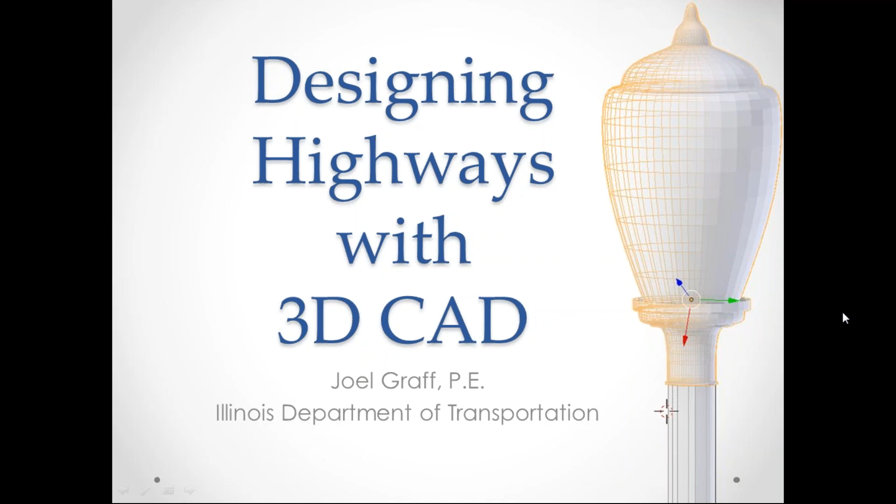So to get started, hang on a second here. There we go. So to get started, we're going to explore 3 key questions as we go through this presentation. Number 1, why at IDOT are we doing this? Number 2, how does this work? And we're going to talk about 3 different areas in which 3D modeling applies. Number 1 is construction. Number 2, visualization, which is more preliminary engineering. And number 3 is design. And finally, we'll briefly look at what it's actually going to take to get there from where we are right now.

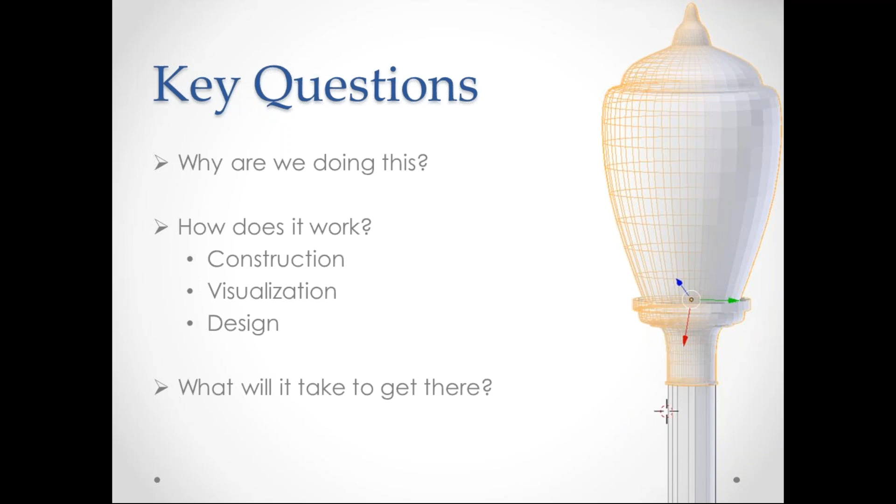When we talk about why we're doing this, there's an executive leadership commitment that states that IDOT wants to implement 3D engineered modeling from project conception and initiation through maintenance and operation.

Notice the scope of that statement: project conception and initiation through maintenance and operations. In IDOT, traditionally, project lifecycle consists of 4 key phases. Phase 1, preliminary engineering. Phase 2, design. Phase 3, construction. And phase 4, maintenance. So most people don't even think of maintenance, but project lifecycle actually continues through that.

And this 3D model will begin in our preliminary engineering and be useful in public meetings, through design, in developing and engineering the final product, in construction and building, and then finally in maintenance, where we're going to be able to track significant changes, things that we do to the roadway in our maintenance cycle, so that when the next project that goes through there needs to know what's been done in the intervening time since the end of the previous construction and the start of the next project, they will have that 3D model which describes all of the maintenance activities which have occurred in that time.

But the real primary reason why we're doing this, at least now, is because general contractors, more recently, have incorporated higher technology into their construction equipment, to the effect that the equipment is now GPS enabled. And with the ability to program 3D coordinates into their construction equipment, they can establish grades quickly and efficiently.

Well, how does 3D modeling work then? What exactly is this process, and how does it actually work for us in an engineering context? Well, it's important to distinguish the 3D modeling we're doing in this context. In order to really understand the value of it, we need to talk about how we do engineering right now in CAD. Our current processes are focused on 2D CAD processes. And so in the end, what we're doing is creating a model of reality. In fact, everything we do at IDOT pretty much is all about modeling reality somehow.

And right now, using our 2D CAD processes, in order to create a model of the finished product, we actually have to create 3 distinct models. Generally speaking, they're the top, side, and front views. For any of us who are familiar with CAD, that's pretty familiar terminology. In the industry, we call them plan, profile, and cross-section.

In a 3D model, we're building one and only one model. And this model is parametric and volumetric, and we'll talk about what that means in just a little bit. This is a model that everybody uses across all phases. It's one and only one model that everybody has access to. And finally, those 2D views that we live and die on right now really become just a secondary consideration and can be arbitrarily generated at any point in the life cycle.

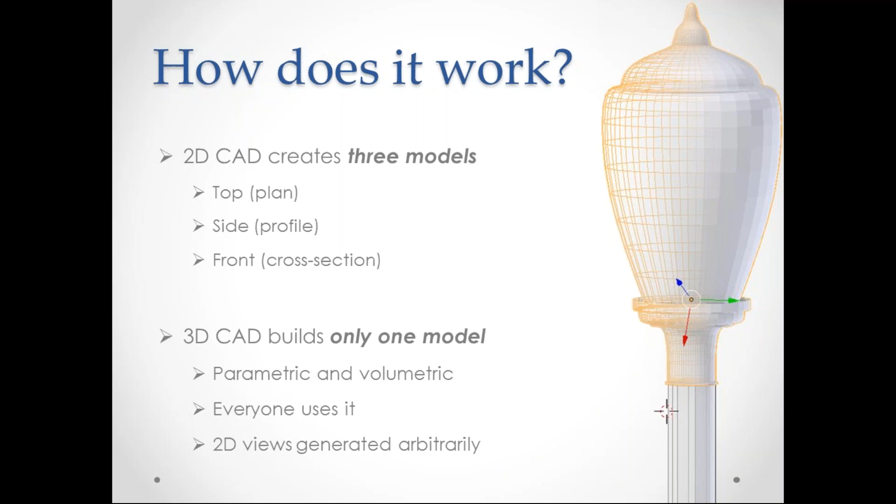So when we talk about this new 3D modeling, it's important to understand that what we're talking about is actually parametric modeling and not 3D modeling in the traditional sense. 3D modeling in the traditional sense is all about building meshes, points interconnected by edges that generate surfaces. If you take a look at the background graphic there on the right, you see a lamppost. It's an asset that I created for something we'll see in just a little bit. And you see the wireframe mesh that lies behind that surface.

In traditional 3D modeling, the sort of thing you'd see at, say, Pixar when they make a movie, they are focused on working with that mesh directly, pushing and pulling vertices to change the shape of that surface. That is a very complex and detailed way of dealing with 3D modeling. It's something people go to school exclusively to do, and to try to put that on engineers trying to build highway models just isn't going to work.

Parametric modeling sidesteps that whole issue and allows us to express or design our 3D models in terms of engineering parameters and constraints. And as a result, once we've specified those parameters and constraints, the software then generates our 3D model for us based upon those specifications. It's a much more powerful, straightforward way of doing it.

But in the end, the workflow to actually build something in 3D is completely different from doing something in 2D. I might liken it to moving from Windows to Mac, but I can't even say the comparison is that similar. I think it's even more different than that. And so the mental shift that's required to think in terms of 3D parametric modeling versus our traditional 2D processes is really substantial, and it's really a major hurdle.

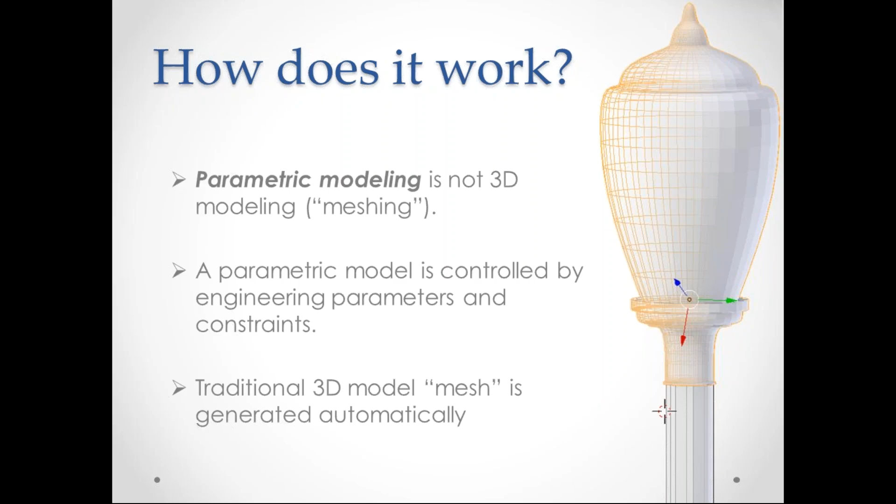So in terms of construction, ideal applications for 3D modeling are primarily new construction and reconstruction projects where you're undergoing major profile and/or cross slope changes, okay? Again, in terms of construction, there's little or no benefit for projects where you have narrow surface widenings, mill and fills, overlays where you have little or no profile or cross slope changes, locations where you have poor GPS signal.

And I'm not only talking about the boonies in the middle of nowhere, but also urban environments where you have large buildings that might occlude that signal. That makes 3D models less valuable in terms of construction. Also locations where there's little or no existing survey.

That is becoming less and less of an issue these days than it used to be with the proliferation of LiDAR data, for example. If I'm right, the state of Indiana has put online LiDAR data for the entire state to varying qualities and degrees. So the proliferation of survey data is making it less and less of an issue, but it's still a problem out there.

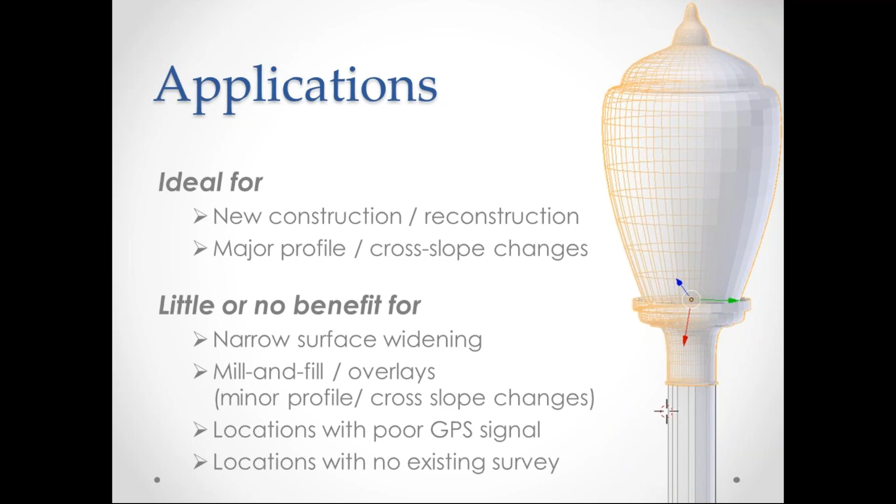Actual benefits that we see on the ground in construction. Number one, the goal is to have a 3D model that is fully constructible. The idea is that once a 3D model is published from design to the construction phase, that model will contain anything and everything required to fully construct that project. The ability to stake anywhere within the project limits is entirely possible. Every point in that entire project is defined, and so every point can then be staked.

We have improved accuracy in transitions, intersections, and earthwork. That's especially important because right now, contractors who wish to produce 3D models from a 2D project can do that. They can take a paper set of plans from a DOT job or something, and they can produce a 3D model from that.

But the software that does it doesn't generate very good accuracy where you have funny stuff going on, you know, transitions from a side road to a main line or tapers or things like that. It works best where you've got long, straight, generally unchanging sections of roadway. This, of course, being a native 3D model from the start, will eliminate those sorts of inaccuracy issues.

Utility conflict identification is greatly enhanced, with the caveat of garbage in, garbage out. At IDOT, we are a member of JULIE, and we rely on the accuracy of the utility owners who are also a part of JULIE to provide us that information. We are not saying with 3D CAD that the location of the existing utilities is any more accurate than it was in the past, since we don't have control over that.

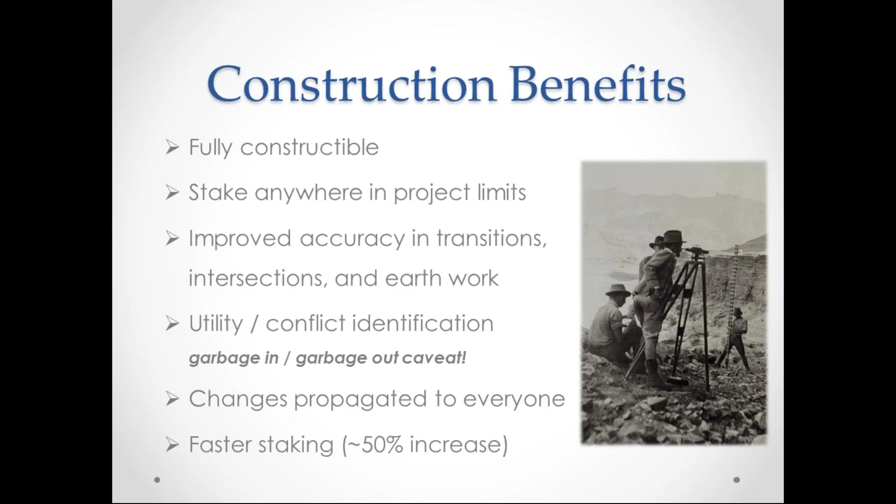But the real value from my perspective is not so much how it helps construction. That's well established and has been proven in practice. The real value is figuring out how it's going to help us in the preliminary and design phases of a contract project. And so I want to take a moment and focus on visualization. Visualization is really all about preliminary engineering. It's not a part of the IDOT roadmap right now, but it's going to very quickly become a part.

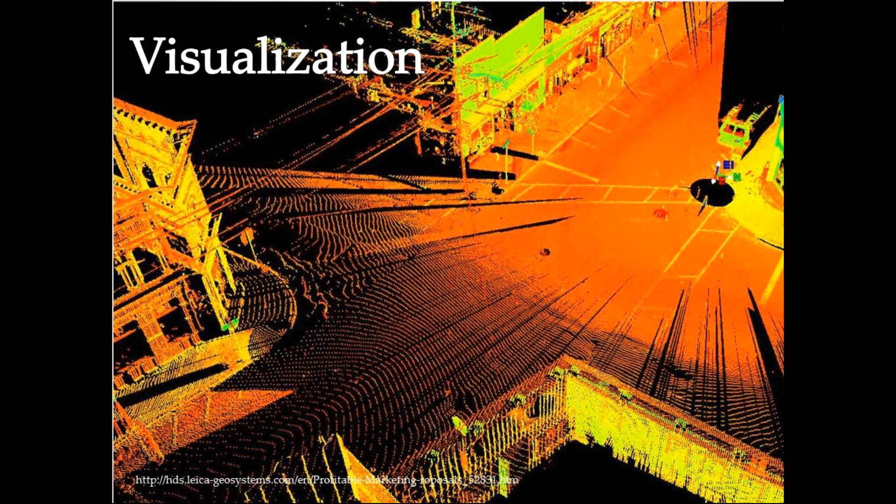It's going to be a very valuable addition to the process of developing a highway engineering project. When we talk about visualization, what we're doing is we're producing an existing model of a location that's going to see an improvement, and merging that with the proposed improvement. Okay, we've seen this done all sorts of times. We've seen the color printouts of, say, a river and a picture of the proposed bridge pasted on top and things like that.

But in a 3D sense, when we produce a 3D model for visualization for preliminary engineering, we are able to increase the amount of information that we can communicate with a single model 50 to 100 times over the amount of information you can communicate with simple two-dimensional pictures or plan and profile views and cross sections.

Because you're really asking a lot when you take this stuff, especially to stakeholders and public meetings and local officials, to ask them to look at these two-dimensional engineered drawings and abstract in their minds the proposed 3D model that we may intuitively see as engineers. And by producing that 3D model, everybody intuitively understands 3 dimensions. We are 3-dimensional creatures, and we can very easily extrapolate the end result from the 3D model.

Another advantage to this is that they can be interactive. And when I say interactive, what I mean is they can be anything from a pre-programmed fly-through going down the road or along a path to a model where the user can actually navigate themselves through it. And the other advantage, at least on an internal side, is it allows us to rapidly prototype solutions early on to see how they look, how they impact the environment, and what sorts of challenges any one given solution may provide in the course of doing the design engineering.

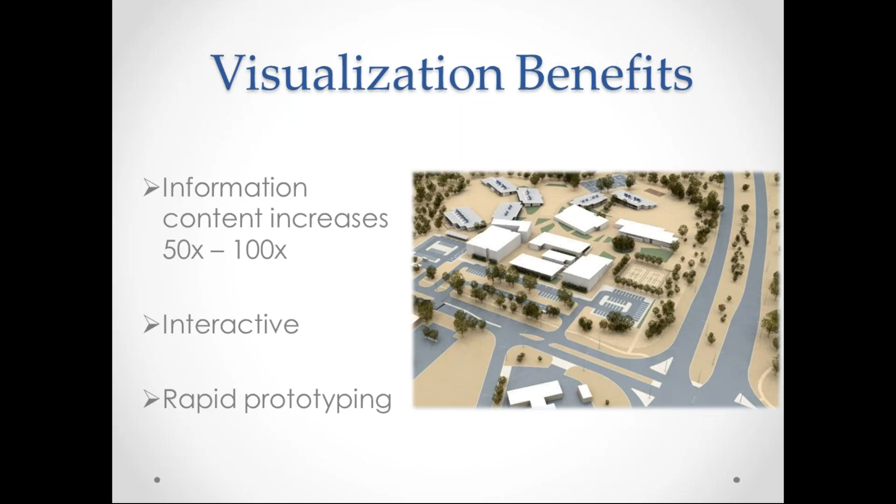So when we talk about prototyping and building a visualization, a preliminary engineering model, we need first to reproduce the existing infrastructure, and that's done primarily one of 3 ways. Number one, we can grab existing LiDAR data. It's a tool that's out there that everybody knows and uses a lot. A second is laser scanners, and if you're not familiar with laser scanners, they look like total stations, like your regular survey instrument. You set them up on a street corner, you push a button, and they literally scan their environment, producing what's called a point cloud of data.

If you look at the picture on your right, it looks like a dense contour map where you can see the sidewalk, the street, the back of the stop sign, the facade of the building. You can even see the power lines. Those are actually individual points, so dense they look like contours, produced by a laser scanner. Once we've developed that point cloud, we can bring it into a software. We can produce a mesh, which creates a solid 3D surface, and reproduce a very, very accurate existing model quickly and easily of our existing conditions.

The other method that you can use is called photogrammetry, and that's more of a manual method. I've actually done this with a church in a 3D modeling software. Somebody gave me 4 low-quality iPhone pictures of the inside of a church, and I built a reasonably accurate 3D model of the entire thing just from those 4 pictures. That technique gets used a lot, even in MicroStation CAD, for producing unique 3D elements or maybe quickly producing a visualization of something where we don't have access to more accurate information.

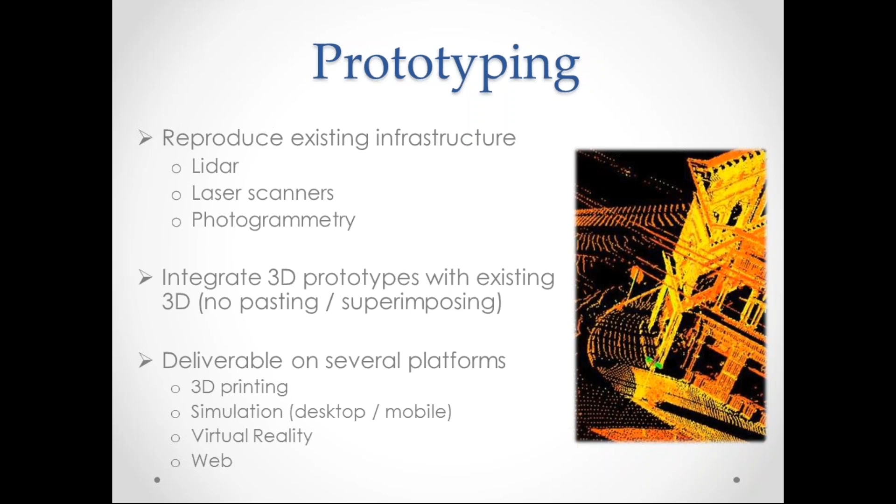So I want to take a moment and show you what a visualization like this actually looks like. When I got involved with 3D CAD, one of the first things they asked me to do was to play around with this project that we're working on. And the project is Route 2 from Byron to Rockford.

If you're familiar at all with that area of Illinois, a few years ago we rebuilt Illinois 2 from Oregon to Byron. We reconstructed the entire pavement, built new PCC, widened it, just did a beautiful job. It's fantastically better to drive now than it was before. Now we're going to do the same thing on Route 2 from Byron to Rockford. And the picture you see in front of you is a railroad overpass on Route 2 just as you're heading out of Byron. And then there's a little pull-off on the right.

And when I got involved in this, I have a history of doing 3D modeling and visualization. And the people that got me involved here at IDOT said, can you do a before and after of this location, of the bridge? Because we want to add a multi-use path and widen the road and things like that. Can you show what it would look like before and after? And I said, well, we can try.

And so I set out to do that just to see what you could do to build a visualization. And I never built the after, but I did build the before. And I kind of want to show you what that looks like. Here we go. What you're seeing here is a 3D model of that existing surrounding. And what I did was I built it using IDOT LiDAR data.

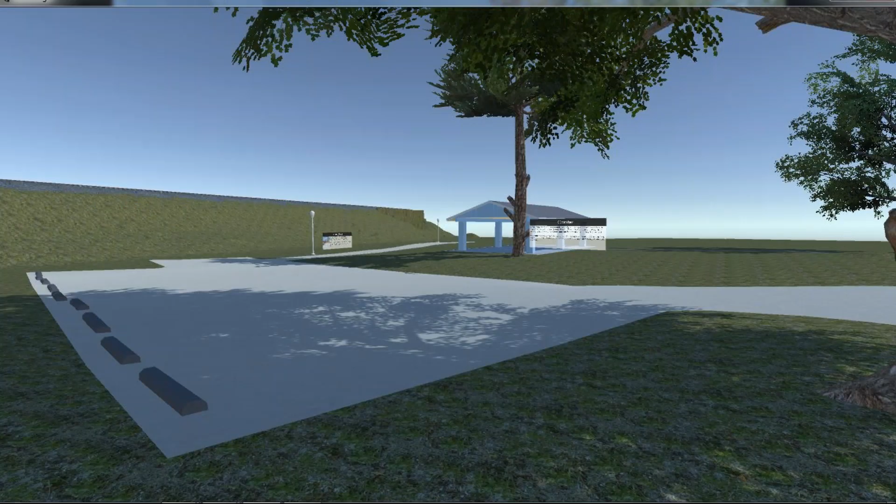I provided a general grass texture for the grass. Unity 3D has SpeedTree trees. It's an algorithm that generates fairly realistic looking trees of whatever type and size and shape that you want. So I was able to reproduce those, and those kind of represent what's actually out there. Parking blocks and the pull-off. The ground, the pull-off, the roadway, all of that, like I say, was pulled directly from IDOT LiDAR data.

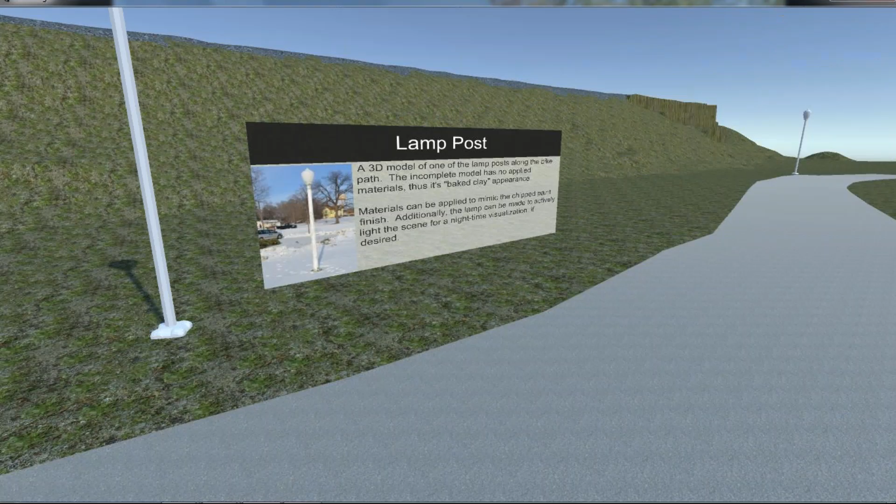Over here we have a pavilion, for which I used photogrammetry. I used pictures I took from the ground and Google aerial photos to build that. I didn't actually take any measurements whatsoever. It turned out fairly well. If you come over here and take a look at the path that goes from the parking area, there's a couple lampposts as it is in the real world.

Here's a picture of that lamppost, and I used this picture directly in Blender 3D to build the actual model. You see that the lamp itself looks kind of gray and clayish. That's because I never actually finished texturing it or applying materials to it. There's kind of a chipped paint look on it. I could have done it. Wasn't really worth the time. If I wanted to, I could actually activate those sconces and make them light things up.

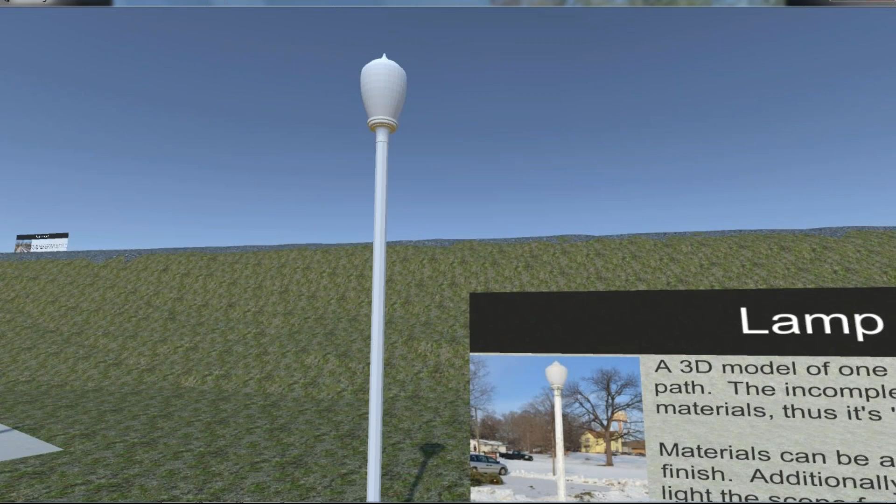We could make this a nighttime scene, and you could see how these existing lights light up the path and compare it to, say, a proposed lighting scheme. We could throw in some proposed lights and show how that difference looks and compare them directly.

If you move up on the berm here, up onto the railroad tracks, I managed to reproduce the actual railroad tracks with the ties and ballast. We can come to the end, and we can see here the LiDAR data ends because the bridge picks up and takes us across the Rock River. And if we go back the other way, we'll just run down the tracks here. We can come up on the overpass, the Exelon overpass itself.

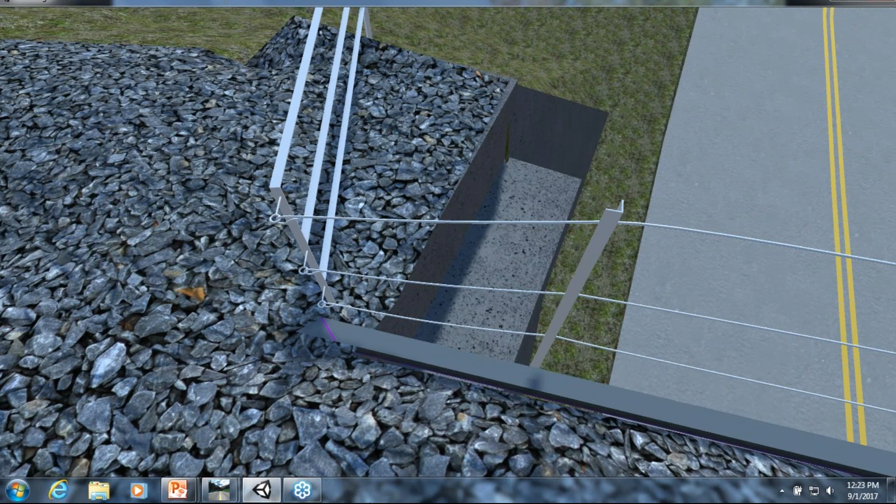And I took the time and actually modeled the cable bridge railing on it. Now, this is not something that could be very easily done. I don't know if it could be done at all, really, in CAD as it stands. So this is something I had used Blender to do, but I was able to reproduce fairly accurately the cable stays or the cable railing there on the bridge, just to see what could be done.

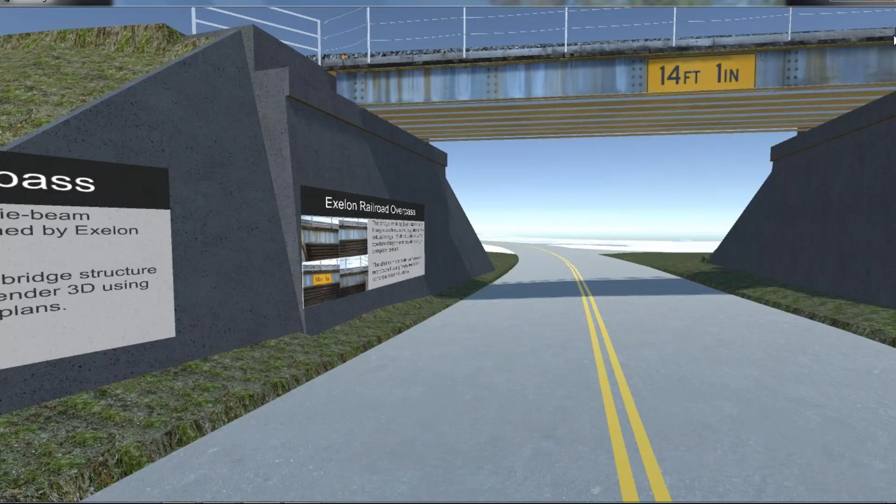But if you jump down and take a look at the bridge itself, what I did was I went out and I took pictures of it, and I got some good close-up photos of the bridge beam, or the facing beam. And this is an old Carnegie beam bridge from the 1930s. So we had the as-builts. I was able to get the beam sections easily online, so it was really easy reproducing that bridge.

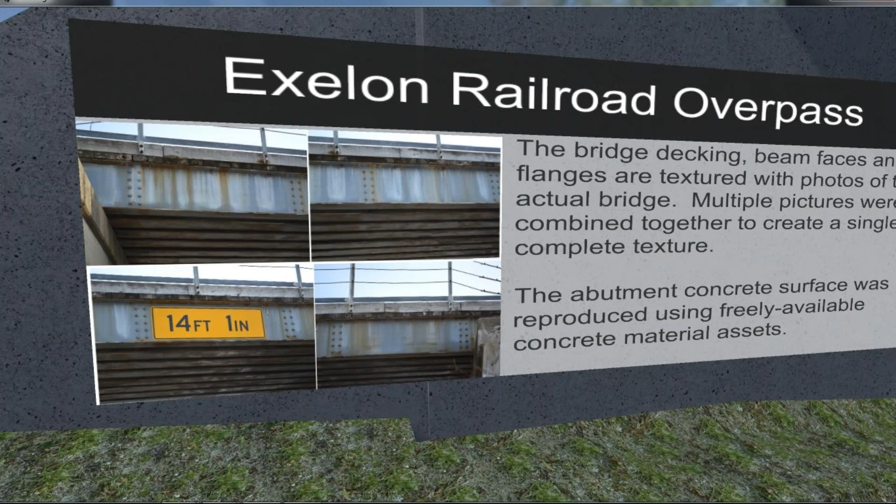And then I went out and I took the pictures, and what you see on that beam are those pictures that I pasted together in an open source photo editor, much like Photoshop. And then I brought it into Unity, and you can see it produces a pretty realistic reproduction.

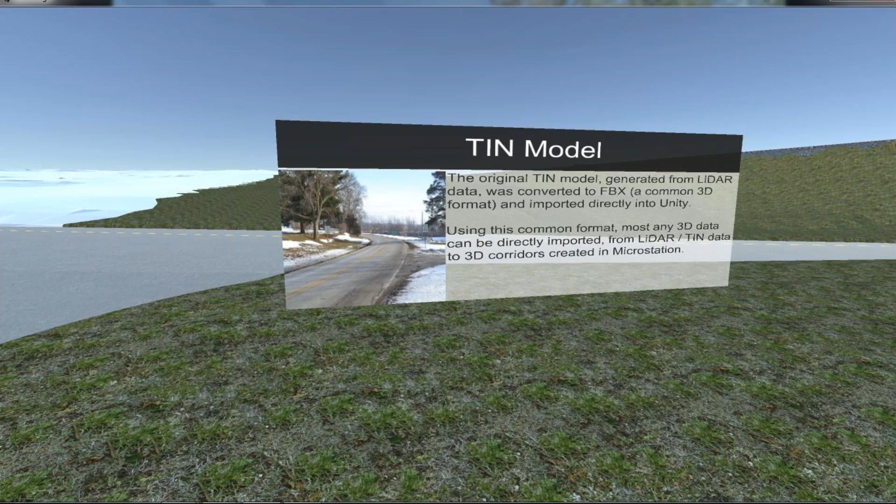I should also mention that one of the other nice benefits to using this technique was I was able to incorporate these floating billboards. So obviously in the course of a public meeting, you'd be able to put up information that would explain to the stakeholders, this is why we did this here, this is why this retaining wall is here, this is why the road narrows here, et cetera, and explain to stakeholders what the engineering processes and problems were as we were working out this design.

So overall, I feel like this is going to be a very valuable sort of element that is going to become a part of engineering, preliminary engineering in the future, probably sooner than we think. But at the time, like I say, it's not really part of IDOT's roadmap.

So moving on though, when we talk about it in the context of Bentley, I used free and open source software with the exception of Unity 3D. It's free, but it's not open source, it is licensed. But in terms of doing it in the context of Bentley MicroStation, Bentley acquired a company that produces a software called LumenRT. And LumenRT is a lot like Unity 3D.

It's not as capable, if you ask me, but it is set up to accommodate civil engineering purposes, and it's certainly much easier and faster to work with. And it allows you to produce really good looking real-time visualizations of a finished product. So for those of us working with Bentley, if and when we get into visualization, LumenRT is going to be the way we'll want to go.

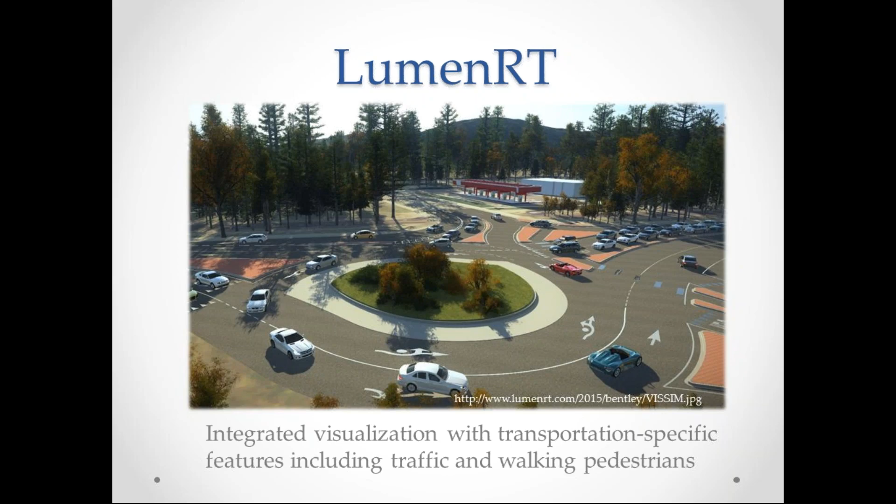But the question that came up was, that trailer on the very end closest to North River Drive, are we going to have to get rid of it? The assumption was, yeah, we probably will. But the question came up and I said, let's see if we can use 3D modeling to figure that out. So what I did was I was able to reproduce the existing roadway inside the trailer park, which is that slightly darker gray that you see throughout the picture there.

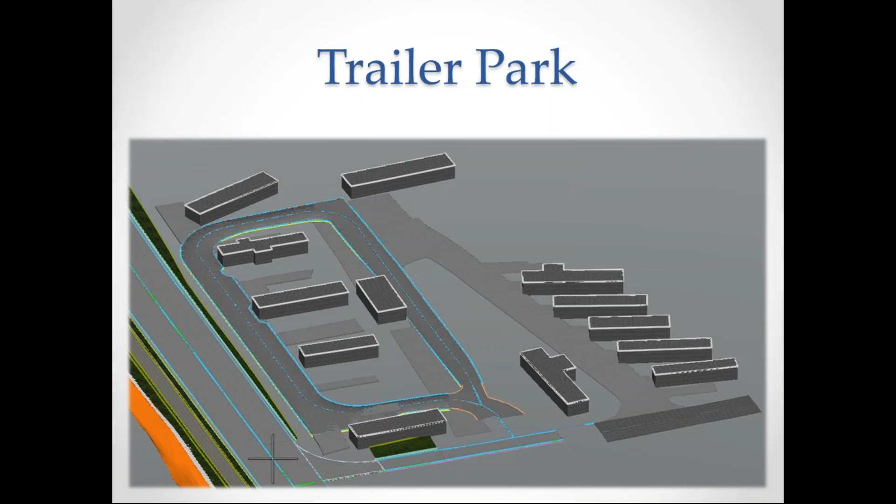And the consensus in the end was that if we play it right and we're careful about it, we probably don't have to move that trailer. So this took me probably a couple weeks to work through because I'd never done it before, but it might represent a few days worth of work now. And in my mind, even a few days worth of work just focusing on that is probably worth it just to determine answers to questions like that.

On the other side of the road is the Lake Louise access road. And this was kind of an interesting challenge because what we want to do is put a multi-use path alongside Route 2 from Byron all the way up to Lake Louise. Now, in reality, we're not actually going to put the path in because we can't convince the local jurisdictions to take responsibility for it. But we were thinking maybe we could at least put in the embankment.

So the question was, that access road along Lake Louise, do we encroach on that with our multi-use path? And the real problem in solving this was that while I had LiDAR data for the Lake Louise area, I didn't have any survey data which told me where the road was. So in order to solve that, I took our 3D terrain and I laid this aerial photo over top of it, and then I simply drew in a center line along the access road, which you can see on the left-hand side there. I faked in a center line basically along the access road that looked pretty good, and I used that to build the model.

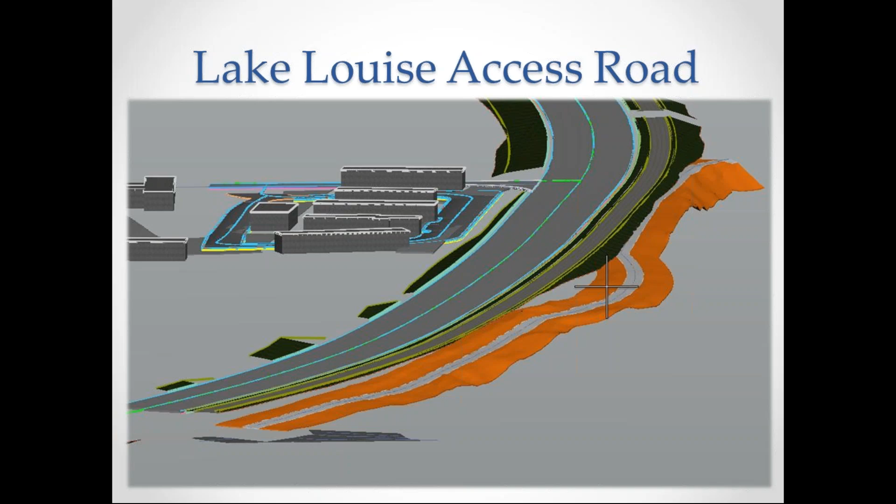Now, is it accurate? Yeah, I don't know. If you're okay with an error of maybe 1 to 2 feet, yeah, it's reasonably accurate. Is it accurate enough for what we're trying to do? Absolutely. And it gives us a picture real quick that tells us that, yes, in fact, our embankment is very likely going to impact that access road right where it's along the front edge of the lake. So there's no moving the access road. We're going to have to do something about our embankment. And again, this took me about a week to do, 3 or 4 days. This would be a day or maybe half a day for somebody who's really experienced at it.

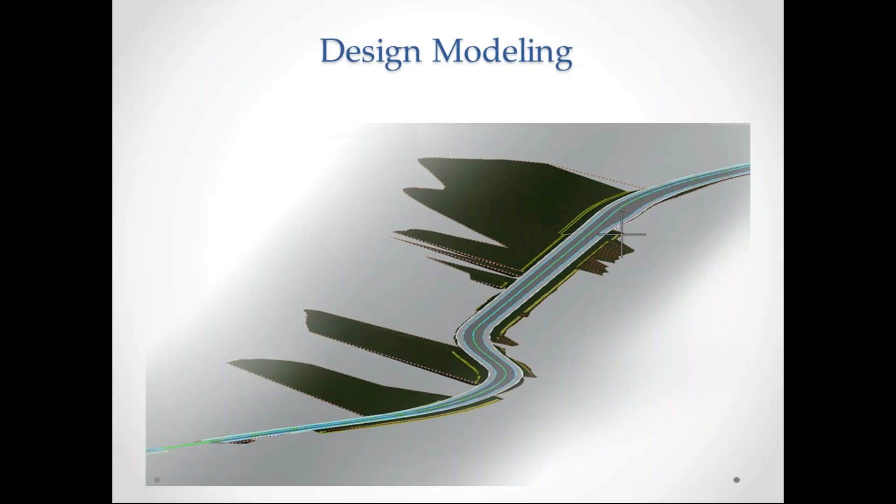So moving on then from preliminary engineering, how then does 3D CAD work in design modeling? And this is where the rubber really meets the road for us. When we talk about design modeling, there's 3 major advantages to using 3D engineering.

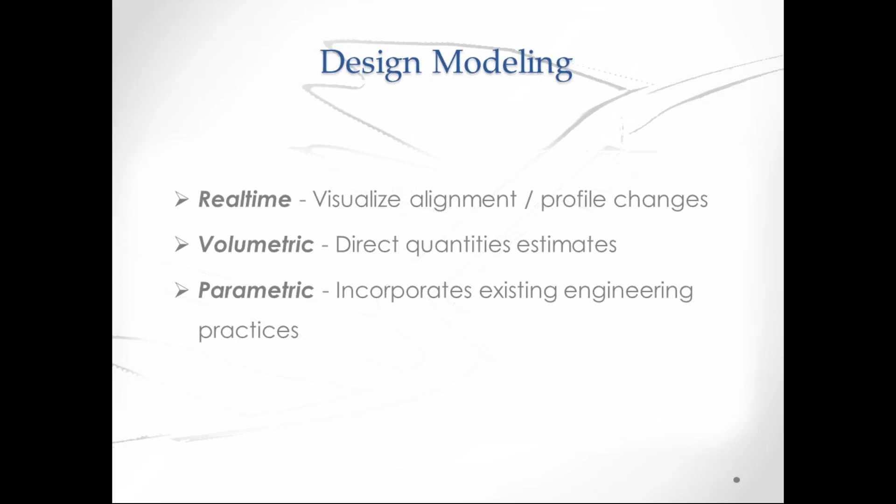So in order to begin a design modeling project, we need first to generate an existing terrain model from our survey data, which is something we're already doing. We need to create our alignments. Now, traditionally, we do that in GEOPAK, and then we bring it into MicroStation. GEOPAK is going to die.

And right now, in the SS4 edition of MicroStation OpenRoads, the software has now incorporated new vertical geometry tools to replace what's in GEOPAK. The COGO geometry system and all of that stuff, it's gone. Everything is now done inside a single DGN file. And a lot of the referencing that we've had to do in the past just doesn't happen anymore.

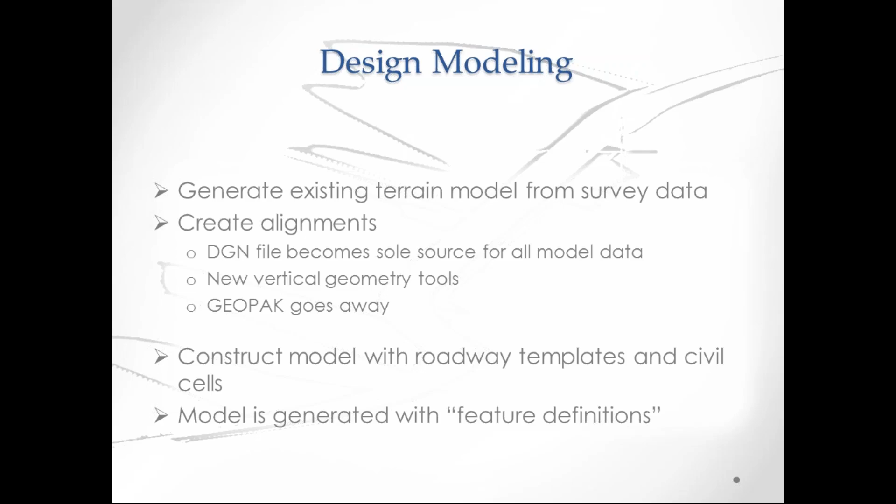We construct our model using two primary 3D tools, roadway templates and civil cells, and we're going to focus on those for the rest of this presentation. And finally, our model is generated using feature definitions. A feature definition is simply a technique in which in the 3D model we can distinguish between, say, an asphalt surface and a concrete shoulder, or a turf buffer and a concrete sidewalk or whatever. And so those feature definitions are really, really critical to the whole 3D modeling process.

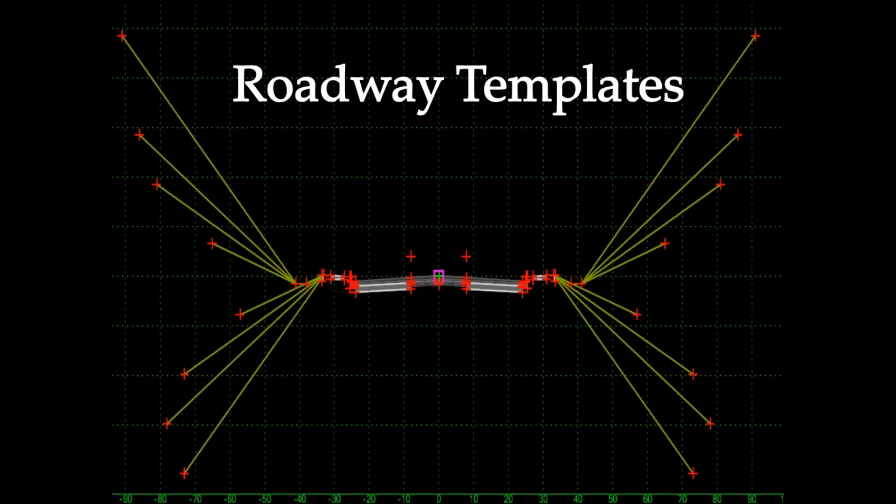This single roadway template, if we were to produce a typical section for all of the conditions that this roadway template addresses, it would take 64 typical sections to accommodate all the combinations of fill and cut slopes and whatever else, all right? So a single roadway template is a fairly powerful tool. It's a fairly powerful way to express what's going on at any given point throughout our project.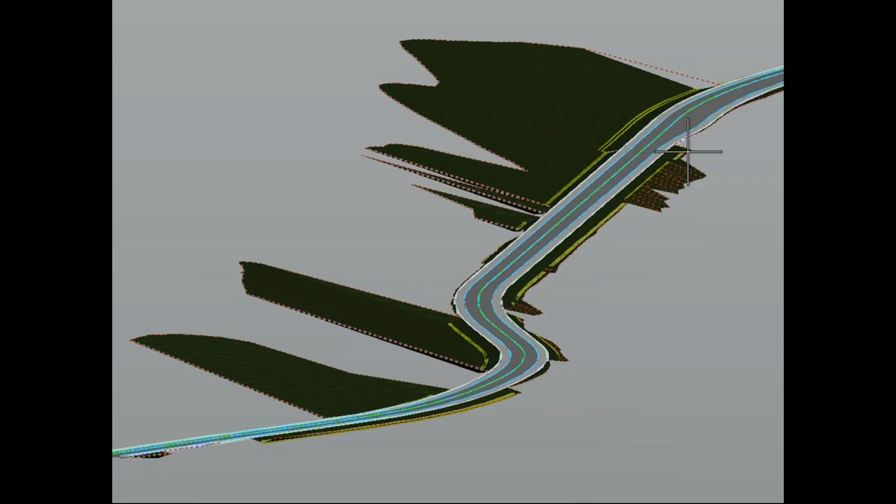So in the first two hours of working on this project, I can generate a 3D model that at a glance tells me where I'm going to need perhaps some retaining walls throughout the project. I can come up with a pretty quick and clear idea of what typical sections I'm going to need and where. All right, it's fairly powerful in that respect.

A roadway template, as I said, it's analogous to a typical section in many ways. It's applied to a corridor. A corridor, the terminology as it's used in MicroStation is identical to how it's used in transportation engineering. It's also what provides us our construction limits, and allows for multiple end conditions to match into existing terrain.

One of the other advantages is that intermittent design elements can be incorporated into a single roadway template. And what I mean are things like curb, shoulder, sidewalk, depressed gutter, things that come and go. For example, from station X to station Y, sidewalk exists, and then after that it doesn't. I can include those into the template and then program the template so that at certain stations it will omit those and just draw maybe a turf buffer or a ditch section instead.

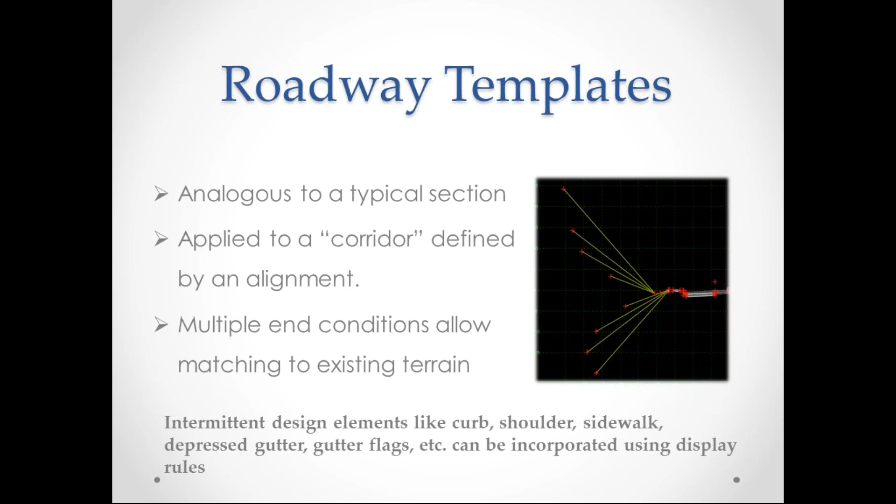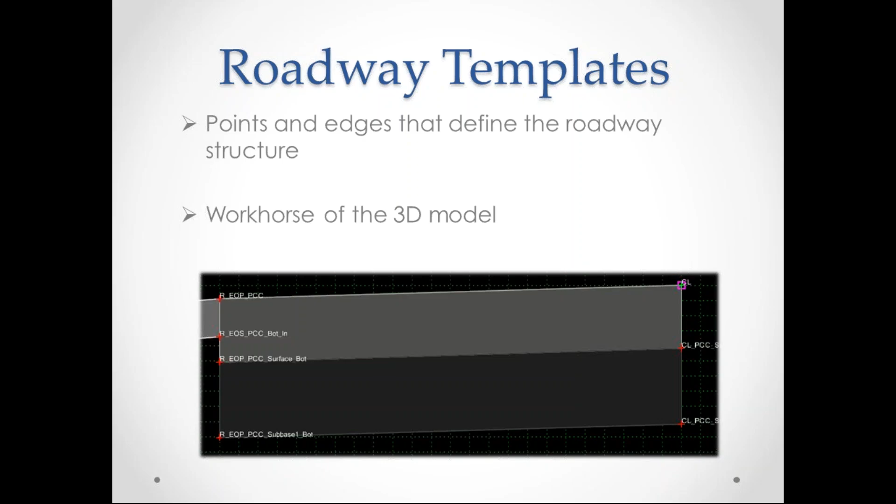And that's really important because the real power of a template is how we control how those points are located in three-dimensional space. How do I determine where that edge of pavement, for example, is with respect to the center line? How we do that gets really interesting, but it provides us an awful lot of power. For example, let's look at a somewhat complex example. This again comes from the Route 2 job.

Well, templates by default use the concept of fixed constraints. These fixed constraints say my edge of pavement is fixed at 12 feet from my center line or 24 feet from my center line and at 1.5% slope down or 2% slope down. Those fixed constraints say no matter where you are, this is how the edge of pavement always tracks with the center line. So if I wanted to build this out, I could use a fixed template to handle the two-lane highway approaching this widening, and maybe the 3-lane section in the center.

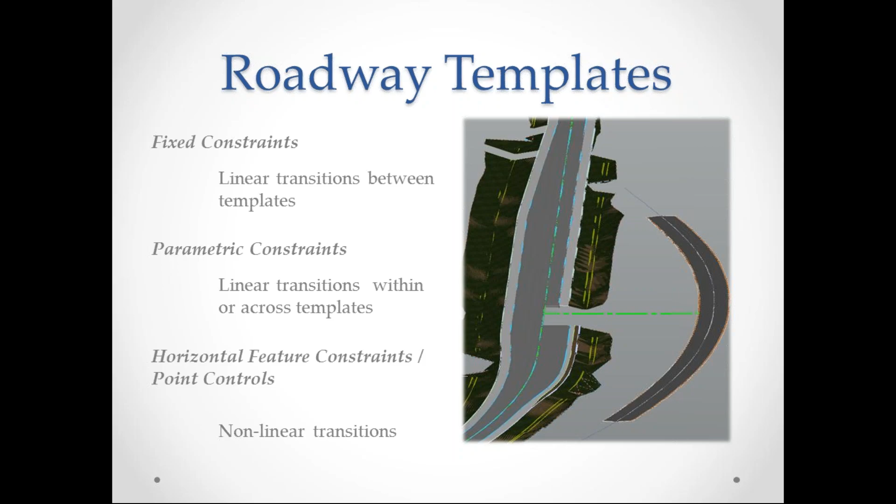But that initial ability to generate cross sections is fantastically useful, of course, for inspecting how well our design meets our engineering policies and standards. The one problem at this point is that we can't generate sheet cross sections from this on-demand view. We still have to go through our traditional processes, which involve GEOPAK.

So if GEOPAK is going to go away, something's going to have to happen to make that happen. And we're hoping it comes sooner than later. It's something we've begged Bentley for.

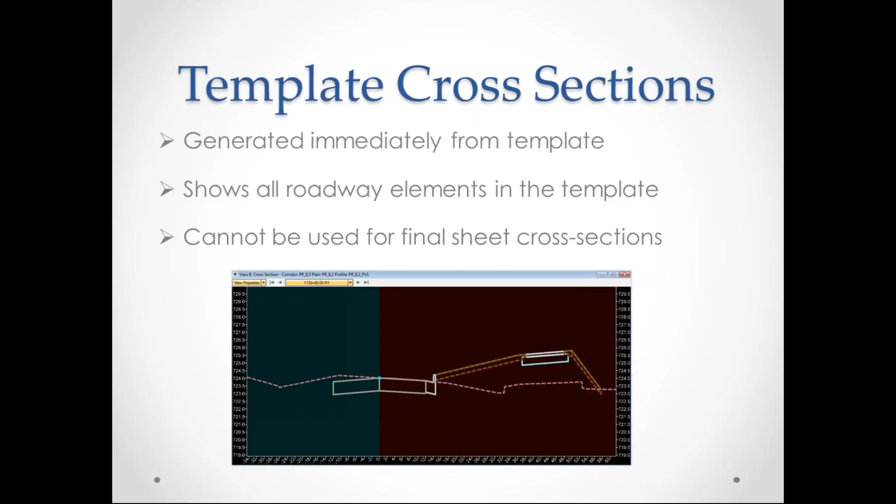When we talk about actually generating our alignment then, our actual model, like I said before, we use the concept of a corridor. A corridor has a single alignment. And throughout that entire corridor, we put in template drops. We take our templates and we have the template drop at specific intervals, 25 feet, 10 feet, 1 foot. It's identical to cross sections and their intervals.

And obviously, the more drops you have, the shorter your interval, the more accurate your model is going to be. Unfortunately, it increases computational time and complexity. So when you begin modeling, you're going to want to keep your template drops to 25 feet and get things roughed in. Then as you get more and more detailed, you'll increase your template drops.

What we can do is we can clip one template against the other. I can clip that side road against the main line. And when I do that, that portion of the side road ditching that intersects the main line back slope goes away, and it looks smooth and it looks a lot better. So it's a powerful feature, but it's one that we want to use sparingly.

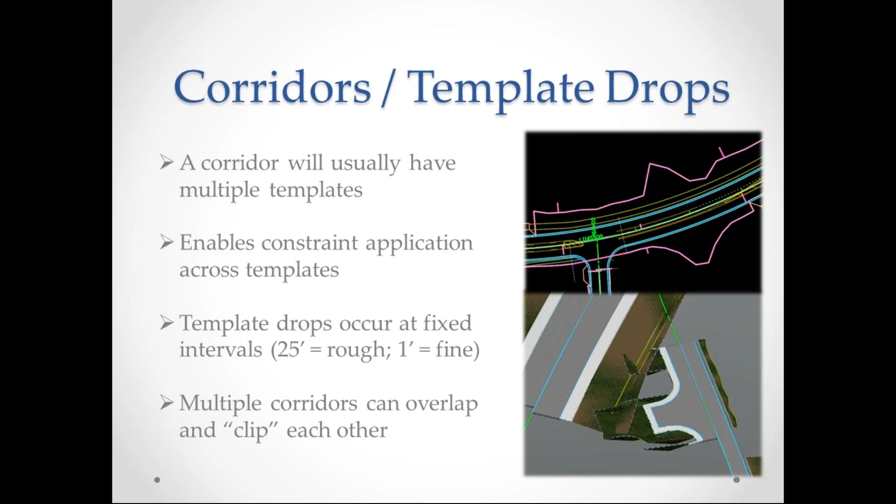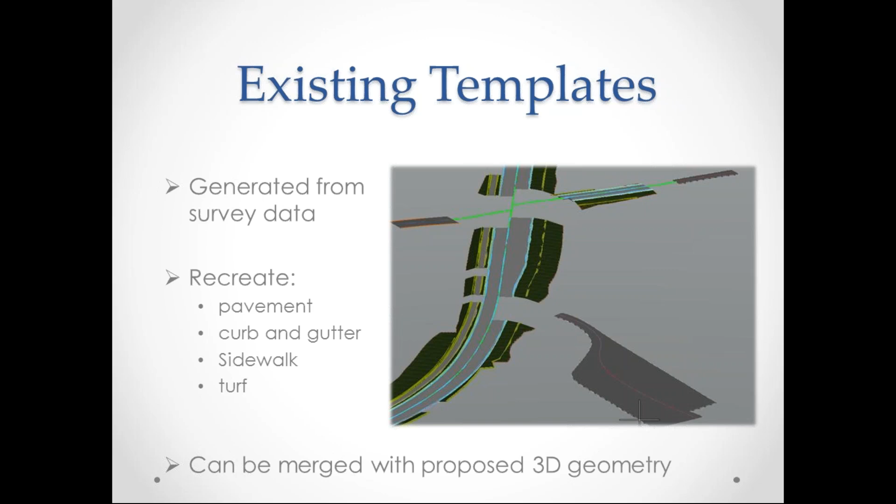And I can recreate existing pavement, curb and gutter, sidewalk, turf, you name it, if I've got sufficiently good existing survey data. So now the only thing to do, for example, in this picture, is to take my proposed main line and my existing boat ramp and connect them with an intersection and entrance pavement. And I can very easily do that once I've got those templates built.

The other element, we talked about, there's two parts to 3D engineering and design, and the other part is civil cells. And civil cells are where the real engineering happens. I probably shouldn't say that, but it's true. The real nitpicky engineering that we spend a lot of our time on happens on the stuff that is handled by civil cells.

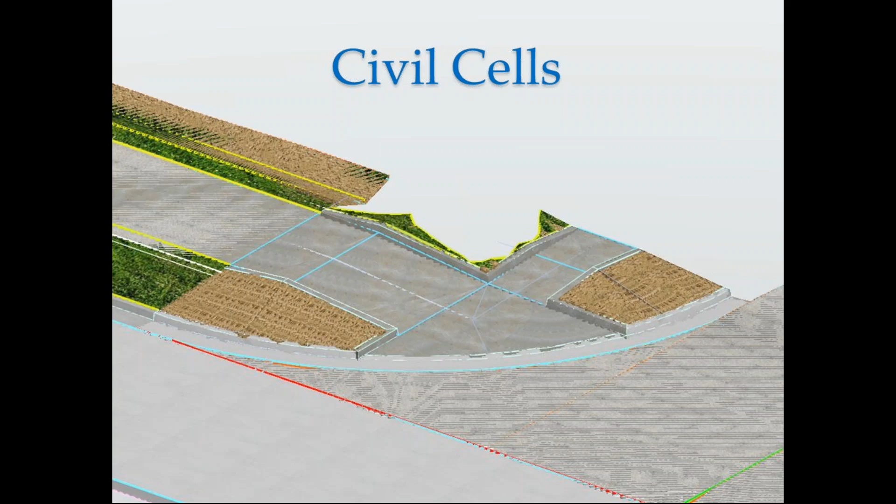Civil cells are modular cells that are used to create, for example, roadside appurtenances that you can't generate with a template. For example, the ADA ramp you see in front of you. And this is one of my own design, one that I did early on, trying to learn how civil cells work. Civil cells are modular in design. They allow us to build things like curb ramps, intersections, median islands, interstate ramps, roundabouts, you name it.

And we can build fairly complex civil cells, but it's important to understand that they're finicky, very finicky. It is really right now the Achilles heel of 3D engineering for Bentley MicroStation. And I'm not really picking on Bentley to say that. I'm just saying it just is the major weakness right now. It's very difficult to learn, and the software is still kind of buggy. It's getting better, but it's not there yet.

Civil cells are parametric. In other words, you can build the civil cell to accommodate our engineering practices. So if I want to, I can generate my roundabout and change it by specifying a radius, or adjust the reverse curve approach to it by specifying the radii of the reverse curve. I can do that, and it'll automatically update and regenerate for me.

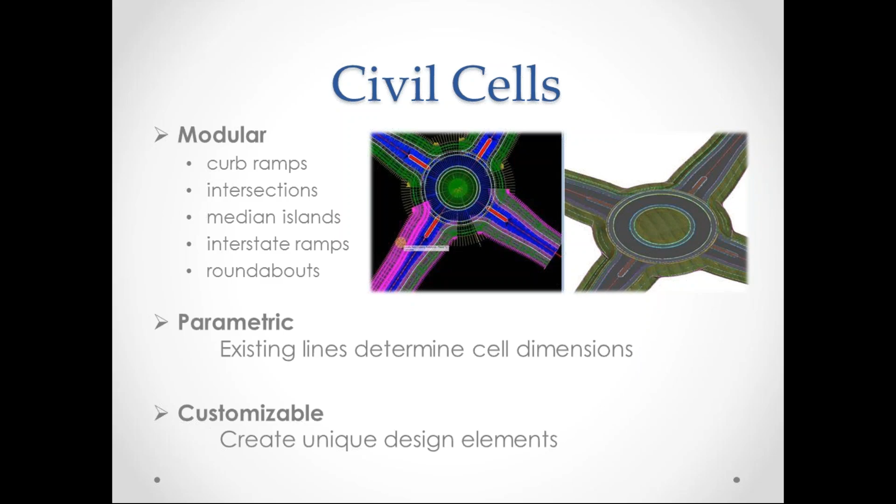It's also customizable. Once I place the civil cell in a 3D model, I can do what's called dropping that civil cell, which reduces it to its base components, just like dropping a 2D complex line does. And then I can go in and customize and adjust those elements to fit whatever condition I may have in that civil cell.

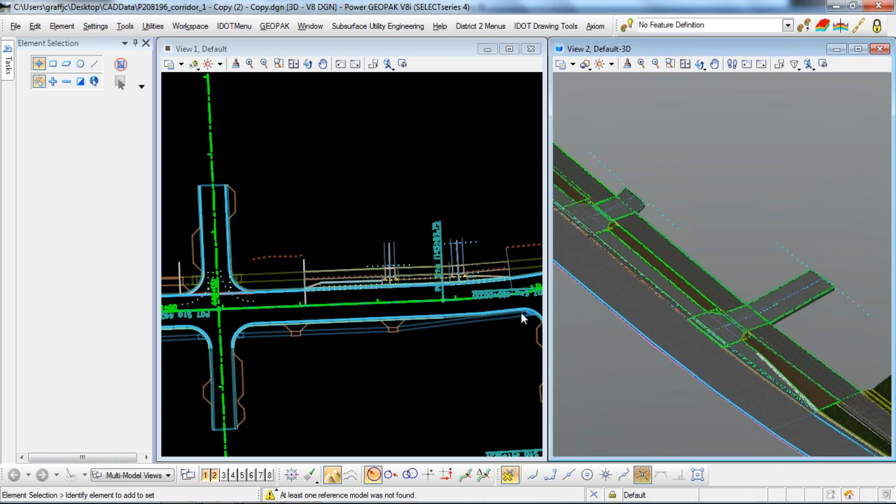Oh, before I get to that, I want to show you a real life scenario where I have actually built something using civil cells. This again is the Illinois Route 2 job in the urban section in Byron. I've recently released internally here at IDOT my first civil cell library, and it accommodates urban entrances. In order to build this library, I picked a rather unique but tricky edge case.

What I have here is a couple of urban entrances, and they have a continuous mailbox turnout that runs through both of them, as you can see, as well as a multi-use path that runs through their throats. I built my civil cell library using this edge case because I felt like it really represented most every kind of case that we might encounter, at least in an urban scenario.

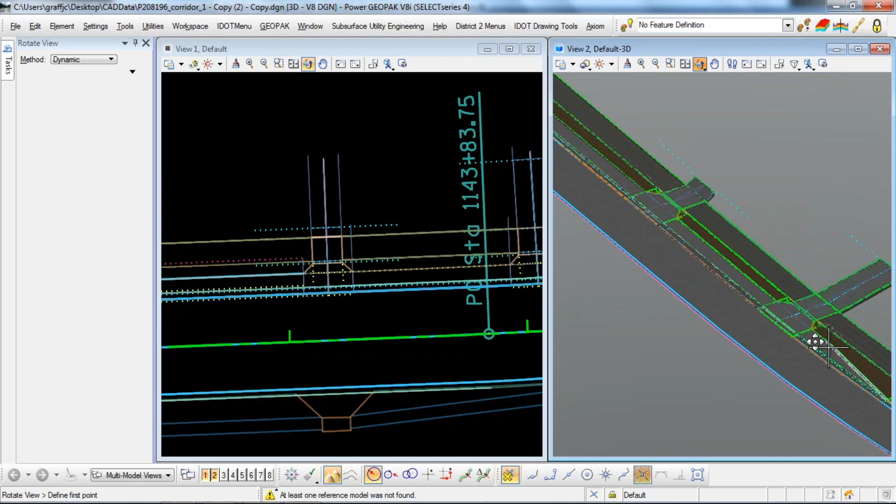And you can see then on the right-hand side, there is the completed model, and we can pick it and focus in on it here. I gotta hit my key point snap. I'm not finding a line. But if we focus in on it here,

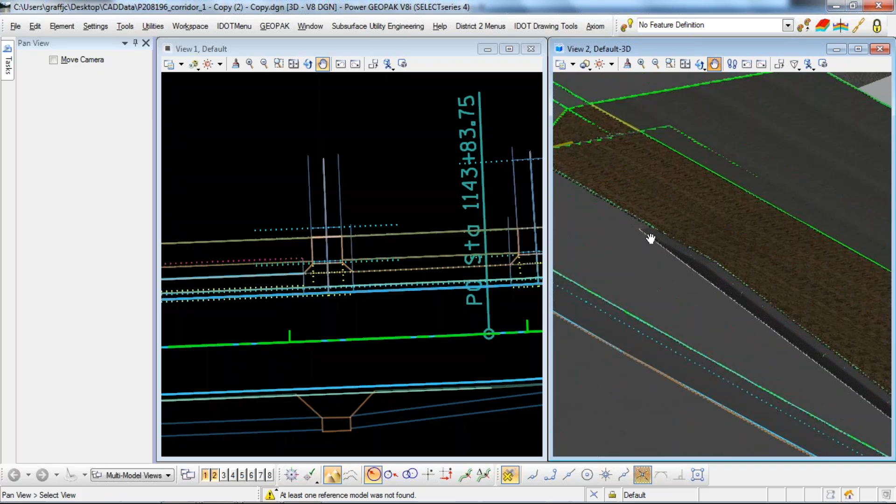you can see that I have my mailbox turnout with my tapered concrete curb and gutter. That's a 6-foot taper. It matches in nicely. Well, not so nicely there, but you can make it match in quite nicely with the curb and gutter. It just takes a little bit of extra care. I have a turf buffer section which follows the top of the back of the curb and matches to my multi-use path. And all of this consists of, I think, 4 or 5 different civil cells that I use to build that out.

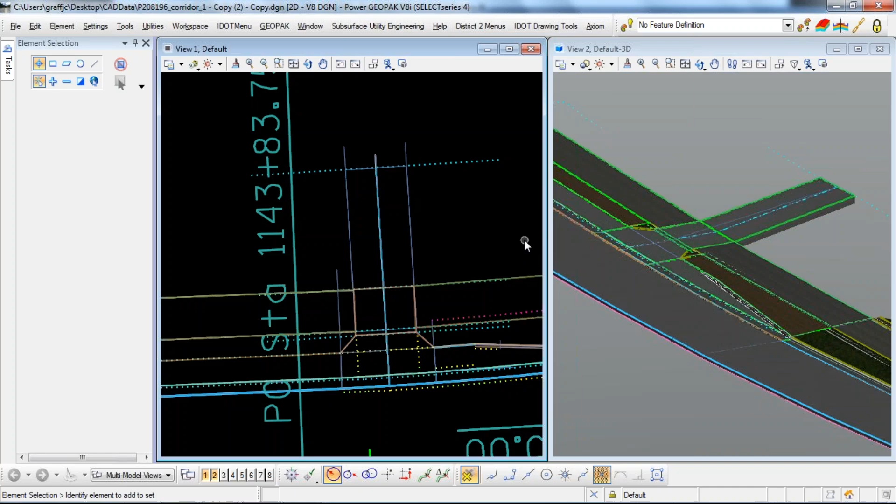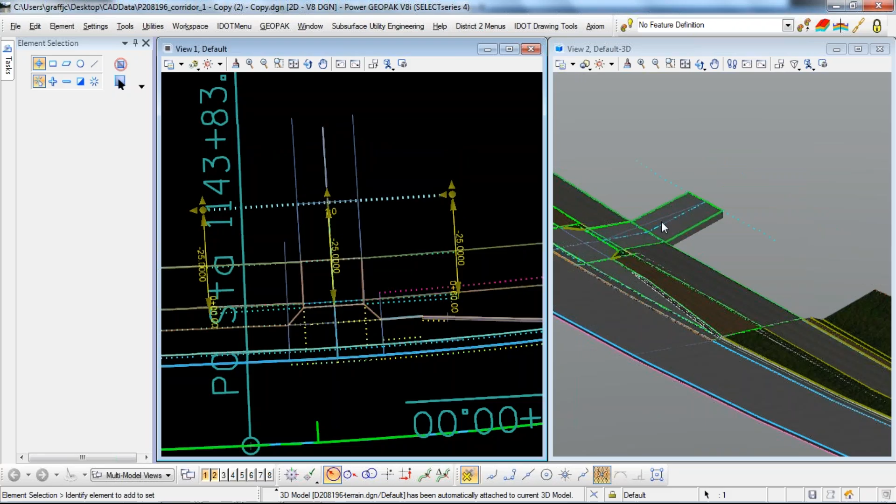Now, once I've got everything in place, I can actually go in and adjust the civil cells to accommodate how things look. So, for example, you see the back of my urban entrance there. By default, it's 25 feet. I'm going to take a chance here and adjust it. This is pretty computationally heavy, and it's been known to crash computers, but we'll see if this works. I can pick certain lines in my civil cell and adjust my entrance. There you go, it updated. According to these, in the sorts of ways that we traditionally do it now.

So when I lay out an entrance in a project right now, I want to work with it in terms of the apron length, the throat width, the throat length. I want to deal with it in those concepts, not in terms of edge lengths and vertices and things like that. And so by adding these specific control lines in the civil cell, I can do that. And here, picking this yellow line, I can adjust half of the width of my entrance.

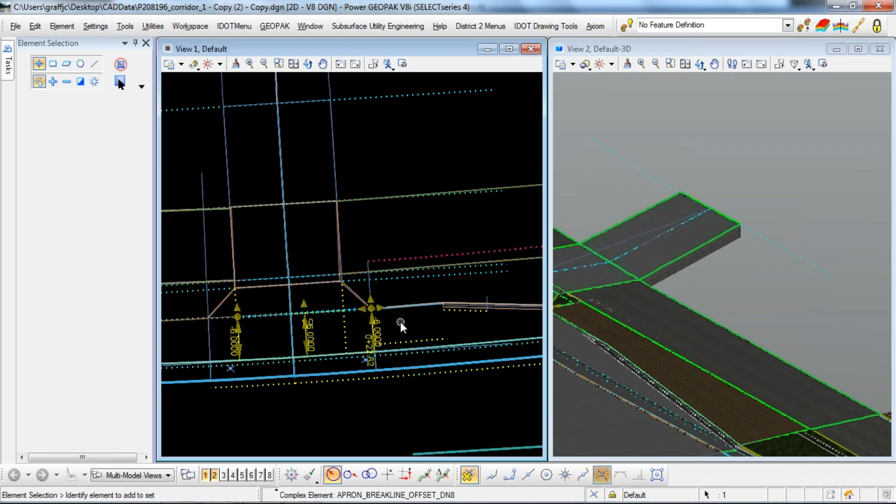I have a mailbox turnout that's offset 6 feet. If I want to reduce the width, I can just pick this here, and that'll reduce the overall width of my turnout. So I can very quickly and easily go in and adjust and change this entrance to suit my needs.

Now, once I've actually placed it, I can go back and double check to make sure it actually fits our engineering policy. For example, you see this entrance, looks like the throat might be just a little bit steep. So what I can do, and again, this is an early design, so things aren't perfect, but I can pick a center line and view its profile. Take our chances here. Here we go.

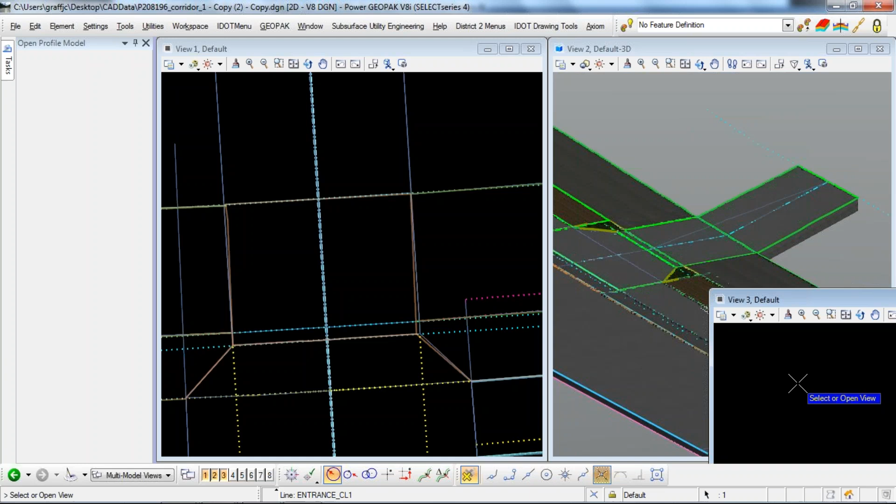And there you see my centerline profile in the dotted blue. If you zoom in on it, here's my curb and gutter section. This would be the apron. This flat part here is the multi-use path. So my apron's at 1.5, my multi-use path at 1. And then you see my problem child, my slope there on the throat, which is terribly ugly. Now I can look at this and qualitatively right away say, oh man, something's got to change.

I need to increase the slope on my apron. I need to lengthen my throat, whatever, but I got to do something. But if I want to know quantitatively what my slopes are, I can produce a report, and that report will quickly tell me what my exact slopes are.

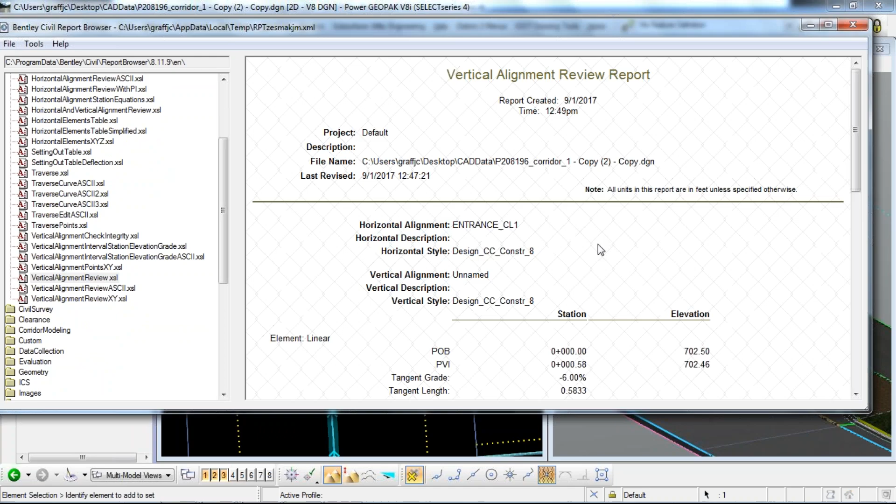So you see here at the top, I see a -6%. That's the slope of my gutter. Down here is a 1%. That's the slope of my multi-use path. And then I look here and I see 33.42%. It's not that I couldn't tell already, but yeah, we got a problem with that throat slope.

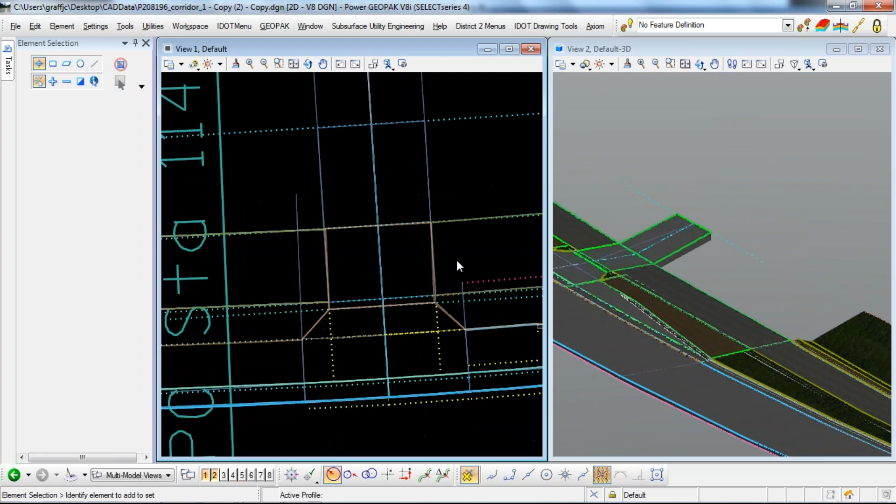So I can very quickly determine whether or not the design meets policy, and then I have all of the tools I need to make the adjustments to make it fit policy. And if I'm using a civil cell and I can't make it work the way I want it to, then we have a problem with the civil cell, because the idea here is that when we do 3D modeling,

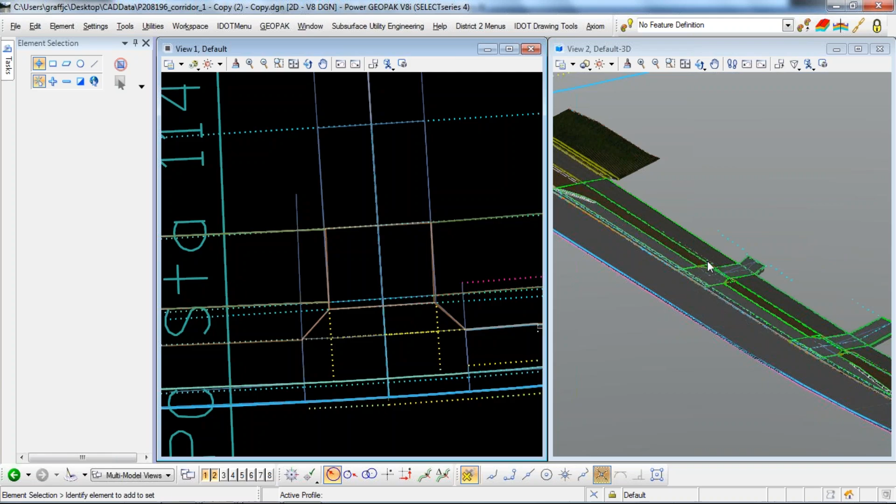we do our engineering in 3D. We don't do this alongside our existing 2D processes, because if we do, it's not helping us. Either we do our engineering in 3D or it's no use to us. Okay, and that has been a key tenet, a key commitment in my mind, as I've gone through and developed these civil cell libraries, and so far it's paying off, and I think we can actually get it done.

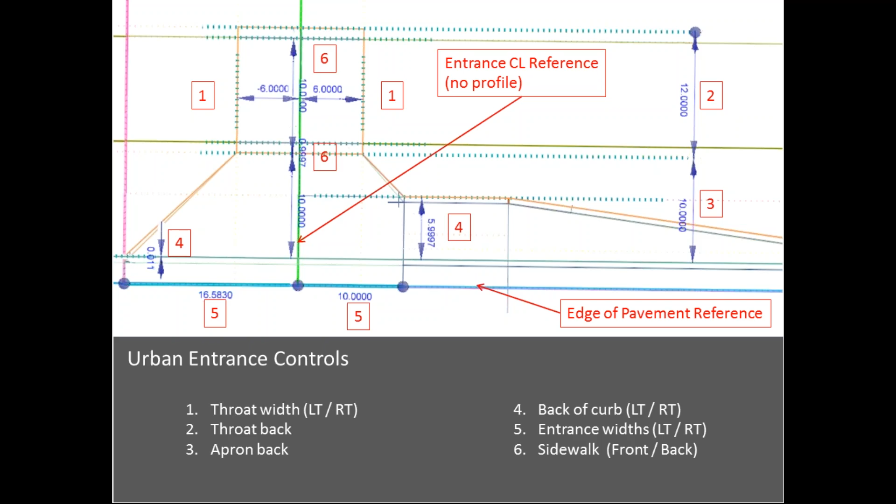So moving back to our presentation, and I'm running out of time. Here's a quick picture of what those control lines look like, and we'll move on.

Barriers. When we talk about barriers, what's standing in the way of actually making this happen for us at IDOT? Number one, first barrier is the software is buggy and slow. It just is. I'm not faulting Bentley for that. What they are doing is something phenomenal, actually. They're taking their existing 2D CAD software and they are back-ending a parametric modeling paradigm on top of it.

That's hard. There's a lot of 3D parametric modelers out there. If you want to play around with them, a good one is the open source FreeCAD project. I'm a contributor on that, so I can't help but hawk it a little bit. It's a fantastic parametric 3D modeler that is, in my mind, leagues above what Bentley is doing here, but that's only because Bentley is working with an existing software that was never meant to do this.

So in time, they'll get better. They've already gotten a lot better than they have been even in the last year. I really think the software will mature, and it will become everything we need it to be. It's just going to take a little while yet.

The other issue we're dealing with is old hardware. We're slowly overcoming that in IDOT. IDOT recently identified power users and gave us upgraded equipment to deal with this. I could talk more about the specifications of what that hardware looks like. But overall, most of our CAD staff still uses old hardware that really can't run the software.

Letting schedules, big thing that's getting in our way. Why? Because we're trying to figure out 3D CAD and still get these projects to letting on time. It's not going to work that way. It's one of the issues we've run into that I can tell you from personal experience. It's simply not going to work that way. And so we're working through that and trying to figure out better ways to integrate 3D CAD without letting our letting schedules basically make that impossible.

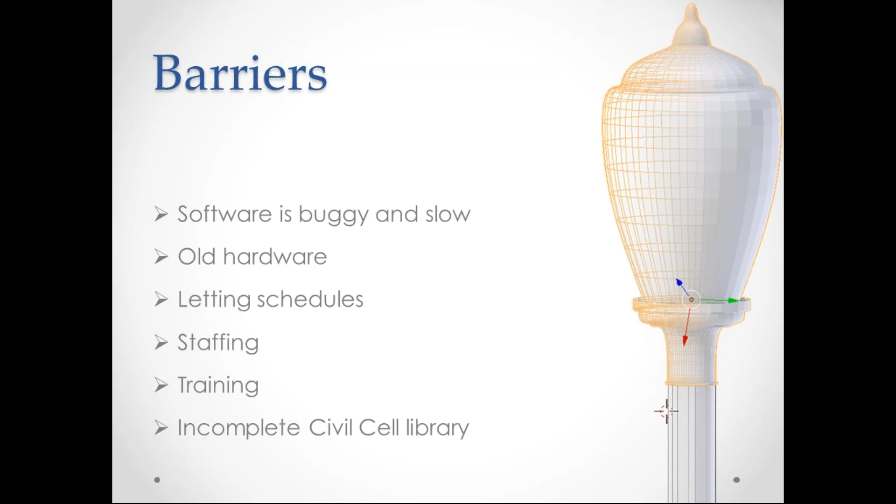So the bottom line, in order to integrate 3D CAD, number one, everybody must use it. We can't afford to have siloed gurus in our organizations. Everybody needs to use it. Everybody needs to be an expert in it. And finally, we need to have our engineering done entirely in 3D, not alongside it. It doesn't make sense to do it any other way.

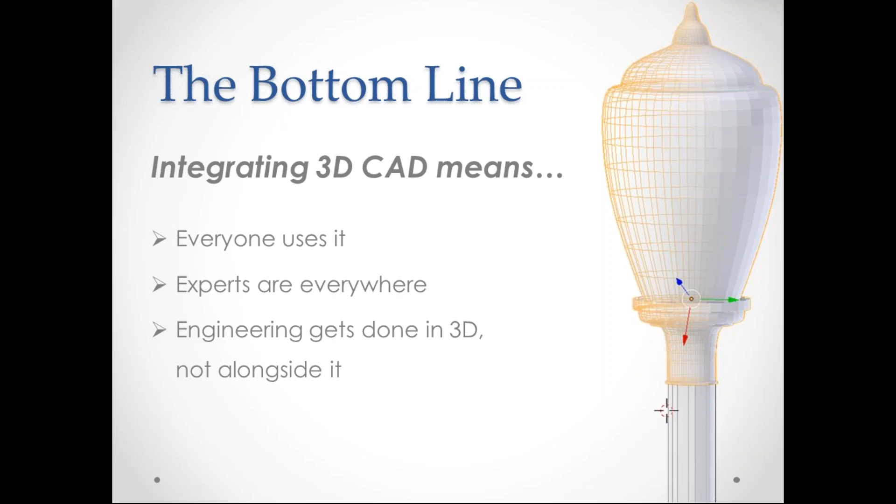So with that, that's all I had. Are there any questions?

And our survey staff for the last few years has been incorporating, I don't understand surveys well enough, but coding points and things to suit 3D modeling workflows. So as a part of that, then certainly SUE/SUDA needs will be met from our survey staff level. We just need to make sure that they're going out and they're capturing the additional utility inlet elevation data that we might need in addition to what they would normally get. And then of course the only thing left for that is making sure that our hydraulic staff and design engineering staff know how to also make use of those tools.